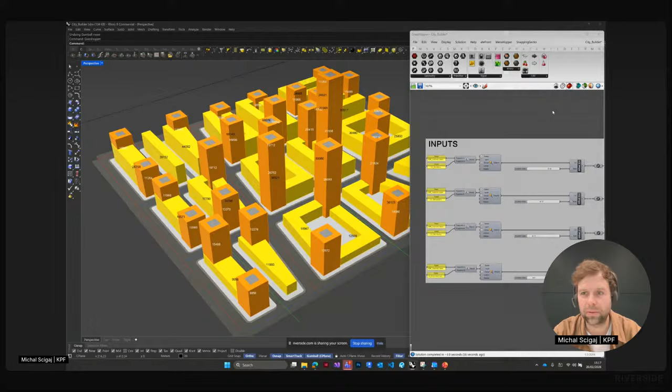All right, so looking at this, I'm hoping that you guys are already ready and you have your Rhino files open. Please open a completely new Grasshopper file. I already have one prepared right here. And let's zoom in at the setting out lines for a second. I will maybe sketch over to explain what we're going to do first, so when we actually do all those things step by step, you understand where we're heading.

So we're going to start from actually generating roads, which will be offsets of those lines. And then we'll connect those lines into one outline, and this way we're going to get parcels. Once we have parcels, we'll obviously divide everything nicely. So we have the surface of a road, surface of the sidewalk, surface of the parcel.

And on top of it, we're going to also create buildings, as you could see in the preview I was showing you earlier, with some sort of towers in the corners, located as far as possible in each parcel, so there is limited overlooking happening. All right, so having this in mind, let's start developing the script. Oops, not here, this way.

So for those who are using Rhino 7, you will probably have to follow the old way of doing things, meaning grabbing the curve component, right click on it, and set objects which are on given layers. So whenever I try to pull out some things from a given layer, you'll have to do it manually.

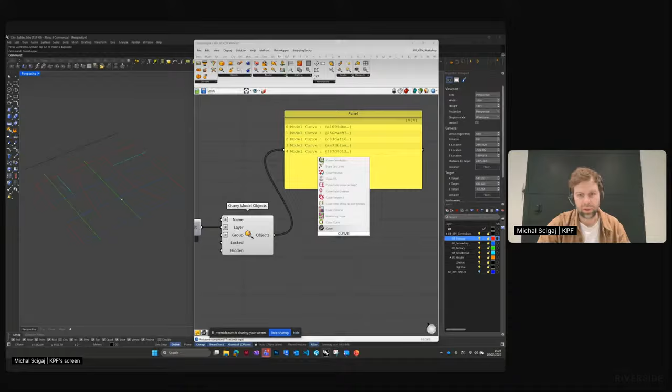So this is still not lines. Lines will be actually collected when we connect it to the curve component, and now you can see the preview visible on the left side. I'm going to actually click this yellow cylinder in the right corner. What it does is it previews the objects which are marked on the Grasshopper canvas. That helps a lot when you have many things happening in your canvas and you want to see only the thing you're actually working on. So I always have this one on, actually.

So the first thing, as I mentioned at the very beginning, was to create offsets on both sides of the center lines. Let's do that. Let's use offsets. Let's first create a number slider from 10 to 30. I think that should be big enough. Yeah, let's keep it like that. If the road is, let's say, 20 meters, when we offset this curve, we actually want half of this distance. So let's use division. Let's divide this number by 2.

Oops, let's try again. Here we go. So now we have 10 in here, and let's plug it into our offset curve component. So we got the offset on one side. Now we need to flip it to the other side. So let's copy it, and let's add a negative node here. Perfect.

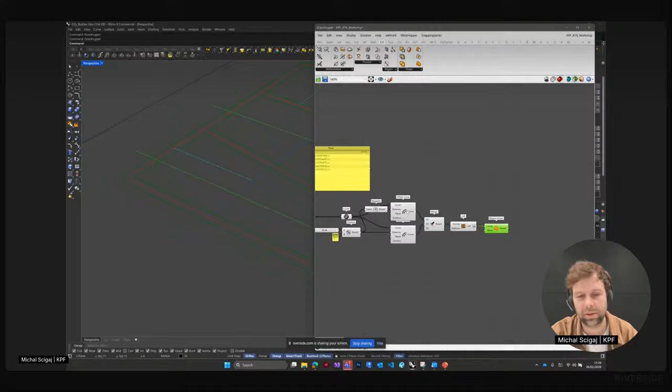Once you got your lofts, let's flatten this. And then we're going to go to the tab called Intersect, and we're going to grab Region Union. Why am I using Region Union? Because now we have one outline: all those surfaces we just created are merged into one big outline. And this is exactly what we wanted to achieve. So this is great. Now we want to do the same exercise with all the other layers.

If I move it to the side for a second, we can remove that now. Let's make it a bit cleaner. As you can see, I'm a little bit obsessive about how clean your script is, because the biggest trouble happens when you do a very messy script and somebody takes over your work and nobody knows what's happening in it. So I'm trying to be very clean whenever I do anything. So I'm grabbing all those things we just created and copying them, maybe 4 times, because we have 4 different types of layers.

And the only thing we will change in each of those inputs is the name of the layer in here. So instead of primary, we're going to do secondary. In here, we're going to do tertiary. And residential paths will go here. Oops. Let's try again. Great. Perfect. I would also turn off the preview, just in case you turn the green button off and everything shows up, it can slow Grasshopper a lot.

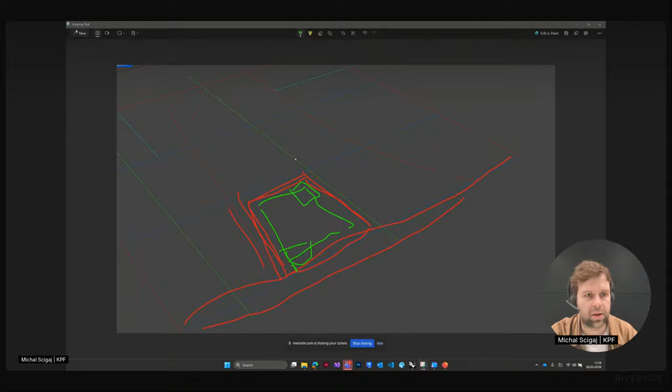We will have to merge all those lines again, as we did with Region Union. Great. Let's flatten it in here just in case. Everything needs to be flattened. And let's add this one here. Perfect. Okay, so if we look at what we have here, you realize that we generated pretty much what we discussed earlier, right? The outlines, which are now creating parcels and streets. Technically, what we have on the screen is parcels and some huge outline, which we don't need at this stage. So let's get rid of it.

How are we going to do this? We're going to sort all those outlines by their area, meaning the smallest outline will be at the bottom of the list, and the largest outline will be at the top of the list. Let's do that. So we're going to use the area component, and then the sort component.

And this way, if I just do a check, let's check what's going on. Let's use the list item component. List item outputs the first item in the list, or any actually, depending on how you set up the index, but the default is 0, meaning the first one. So this is the smallest outline. And if I right click on values A in sort and click reverse, it's going to grab the largest, which is exactly what we want to do.

Perfect. All right, so at the moment we're grabbing the largest, but we actually want to remove the largest, right? So how are we gonna do this? Let's use cull index. Cull index does the opposite to list item. It removes the item at a given index. So we want to remove item number 0 in this case, which is the largest. Let's plug it here, and let's plug this one there. Great. So now we have only parcels, which is perfect. This is exactly what we need.

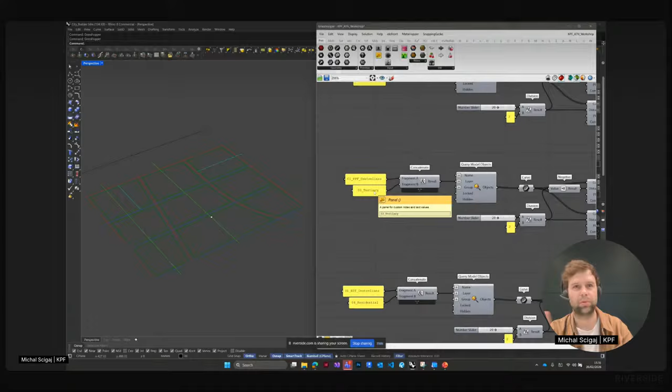Let's forget about this big outline for a couple of minutes. We'll come back to it, so keep it in mind. We want to focus on parcels first and generate all the sidewalks, bring also residential paths, bring also tertiary roads, which are technically back of house roads. So what's specific about those remaining roads? Tertiary roads are technically some sort of back of house road. This road doesn't need any pavements or sidewalks. It's just a pure road, fairly narrow. And oh, I forgot to actually change dimensions of those roads, so we'll do it in a second.

So looking at the script as a whole now, this is where we should be. We have the inputs, we have our parcels right there. Let's change the sizes of the roads depending on their priority. As you remember, going back to the inputs, we gave 20 meters to the primary roads. Let's give 15 meters to secondary, maybe 12 to the tertiary roads, back of house roads, and 10 to residential paths. Maybe let's do 8. I'm more happy with 8. That is great. So now if we look at the parcels, we can clearly see that we have wider roads and narrower roads. Great. All right, let's move on.

So what we're gonna do next is grafting. And why do we want to graft? Because we're gonna bring those back of house roads, and we want them to impact every single parcel, and to do so grafting is necessary, unfortunately. So let's do graft here. I'm also gonna right click on this component and change the wire display to faint. Why I'm doing this is about the readability of the script. I want to indicate that this is a completely new operation compared to this input, and probably we should have one more faint line in here. Okay, let's turn preview off. This way we have a very clean script.

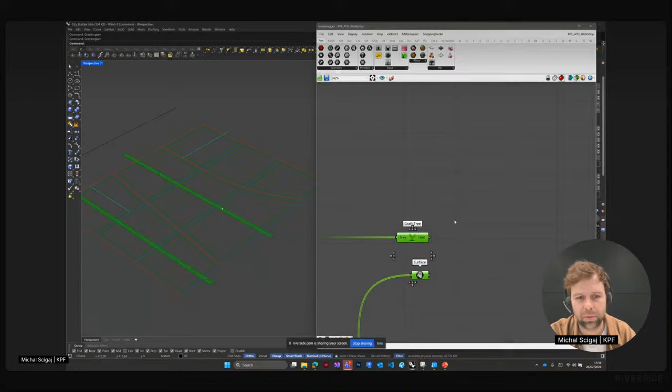To remove this road from the parcel area, we're gonna go again to intersect, and we're gonna use region difference. Region difference works almost like Boolean difference in Rhino. You have one object that you use to remove something from the other object. So from parcels we want to remove our back of house roads. And as a result, you can see the original parcels looked like this, and now we have them without those roads, which is perfect.

Okay. Where are we right now? These are not actually parcels. I would say these are the edges of the sidewalk. To have the exact edge of the parcel, we need to make some space for the sidewalk. So technically, we need to offset this line inwards by 3 meters. So let's do that as well.

Here. And we actually will do it here because, as I mentioned, we don't want sidewalks in back of house roads. So let's do a number slider from 0 to 10, and let's set it up to maybe 3.

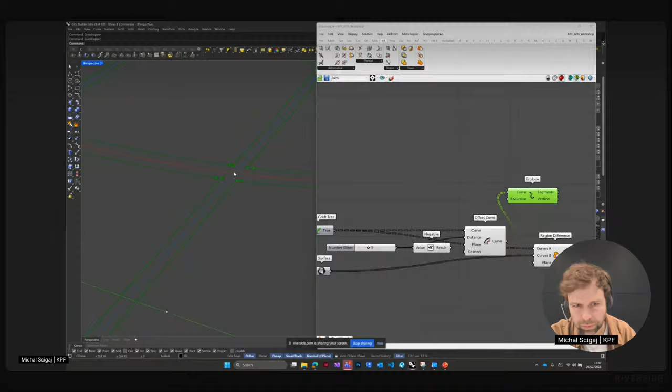So now, as you can see, the new outline is actually larger than the base line, the input line. When we explode this offset line, the offset created those weird extensions that you can find here. There are many methods to remove them, but they quite often create headaches, so I rather don't use them.

When I start thinking about how to build a script, I try to go from outside to inwards. I don't know, that helps a lot.

Okay, so once we have these offsets, we want to remove from - because this is actually the outline of the parcel, and this is the outline of the sidewalk - we want to remove from the parcel our back of house areas, and we want to do the same to the sidewalk outline, which is here.

So as you can see now, if you look at our outlines, we don't have sidewalk anymore where the back of house road is, which is exactly what we wanted to achieve. Perfect. Let's maybe also name this.

So now when we work around those lines, we will be able to find them easily. So this is our sidewalk outline. It should be curved, sorry.

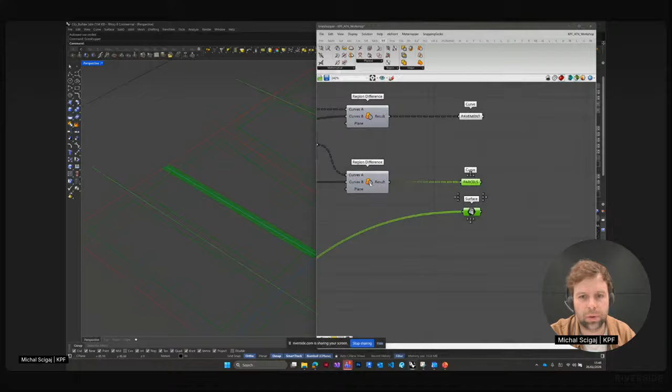Firstly, let's remove those paths from the parcels. And to do it, we're going to use, again, region difference. I'm going to copy this one here. Okay, this is done.

All right, works perfectly. And now another step is to do the same with the pavement. Actually, not doing it with the pavement - we actually want to trim those lines.

And we're going to achieve it by projecting them onto the pavement. So we're going to use the project component. Perfect.

As you can see, I grafted it, and added those curves to curve. I mean, it's the surface, but if you move it to the curve input, it will read it as the outline that creates this surface. And I move the pavement towards the B-rep of the projected curve.

So what we have now is we need to probably simplify everything because the paths of our trees are so deep right now, it's hard to understand what's happening. So let's right click as well on the pavement and click simplify. Let's do the same in here.

So what we have in here, we see that we have paths with a depth of 2, and in here we have paths with a depth of 3. Let's simplify as well to 2. Okay, so they should work with each other now.

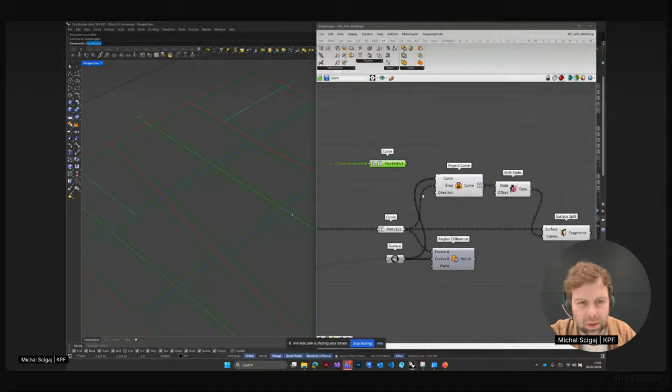Sorry, I probably confused you a little bit. Let me explain. What we want to generate is add those residential paths into our sidewalk. So actually we need to trim it by parcels, not by sidewalk. That's why I moved everything to the other side.

Let me sketch over this. The surface literally has this outline rather than this one, otherwise they won't perfectly fit. So this is exactly what I just did. Okay, so this looks great.

The only thing which is not correct is that we divided the surfaces, but we still want to get only those trimmed outlines of the residential paths. To do it, we need to firstly detect which out of all those surfaces that create parcels are inside the outline of the residential paths. I hope it makes sense, but let me do it and maybe you will understand.

So how are we going to do this? Firstly, let's create some sort of point inside each of the surfaces, and I'm going to use populate for that. Populate as default creates 100 points, we just need 1 point per each of the surfaces. As you can see, I created 1 point in each of the surfaces.

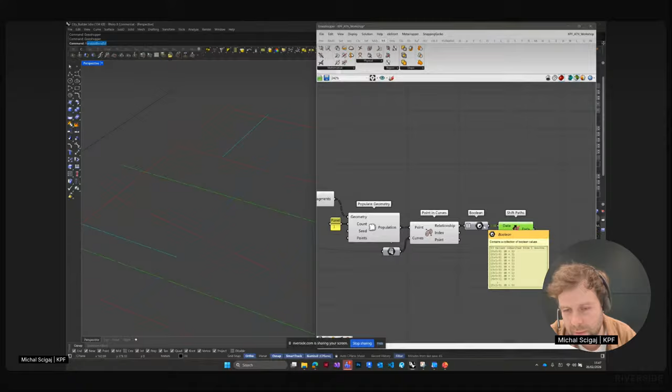So that's great. We want to use Boolean to turn it into a true-false relationship. Let's see if the data tree structure matches what we have right there. It doesn't, which means we need to shift it, so we're going to use shift paths. Shift paths is kind of removing the depth of the path. So here we have a depth of 3 of each branch, and here we have 2, which is matching our input.

Now we're going to use cull pattern to find this line, but it didn't cut it properly in here. This one is still not cut correctly. Let's have a look at what's going on. This one is there, we're happy with that. So for some reason, this one doesn't cut as it should.

Let's use grafting here. Okay, so this is why. Perfect. Let's use grafting here, so let's add grafting to parcels. Just to be clear, if we go back to the parcels we had at the beginning, we're adding graft over there, and now we are good to go.

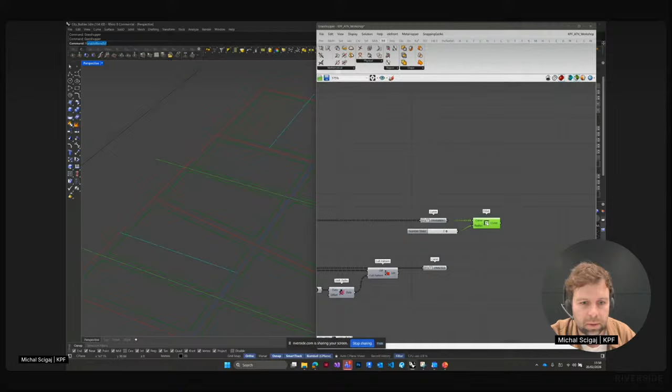For the parcels, we need to use this fillet plus the number of the offset we did somewhere at the very beginning. Let's grab this as a number, and turn the wire into fade so it doesn't bother us when we stretch it across the whole script. Let's add those numbers. Oh, actually subtract, because it needs to be smaller.

Okay, so as you can see, now we have pretty much perfect relationship in terms of the fillets. Only thing which we're missing to actually generate surface of the pavement is region difference, the parcel against the outline of the pavement. So let's take the region difference, bring it to the front.

From the parcel, let's remove the fillet of the sidewalk. Let's remove the fillet of the parcel, and we end up with this, which are the outlines of the pavements. Now we can use boundary surface to kind of fill it with a surface because we had only outlines.

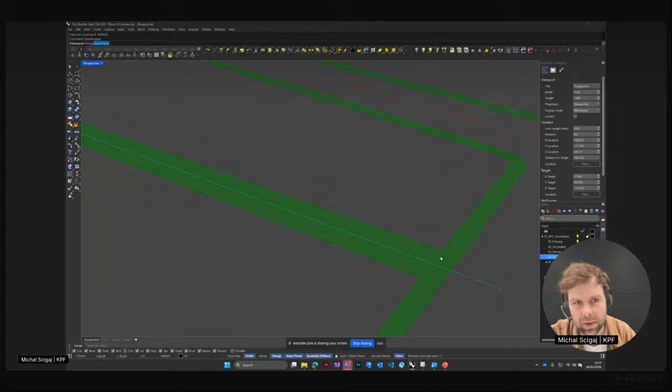And now let's use brep join to join those into one sort of element. But the problem is actually when we zoom in into this location, we still have these faces or edges, which we would like to remove to have a clean geometry.

To do it, we can actually go to surface util and use a component called merge faces. With merge faces, we remove this, we have very clean geometry, exactly what we wanted.

Perfect. So let's use preview. Whoops. Yeah, this is it. Yes, custom preview, this is it, to preview this when we turn this button off.

And it's use color swatch to give it some color. Let's make it gray like this. Let's make everything preview off.

And let's also create the parcel. Let's also preview our parcels. So what I'm doing right now is if I turn off this option of seeing the geometry, and I go to this view, you see I will always see now our pavement with this color. I will make it actually a bit brighter.

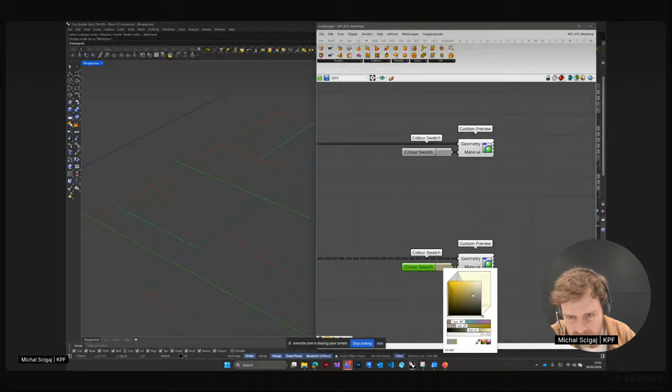Okay, is it visible? Yeah, maybe a bit too deserty.

Okay, so the last thing we're missing are the roads. You remember I told you to leave the outline, the big outline, at the very beginning. This is a moment for this outline to come back to our script. So let's use curve component.

Let's make the wire faint as well. And let's pull it all the way to the front where our outlines of the pavements are, which are here. So what we will do is merge those. This is our, let's maybe type, what is this?

This is pavement. So I'm merging pavement, and this is parcels. So I'm merging pavement with this huge outline we had at the beginning, and then I'm going to flatten this. Preview off as usual, and we have all those outlines.

All we need to do at the end is copy boundary surface component. And here, as you can see, we have roads generated. Copy the custom preview component, connect it to the surface. And let's make it darker since this is our road.

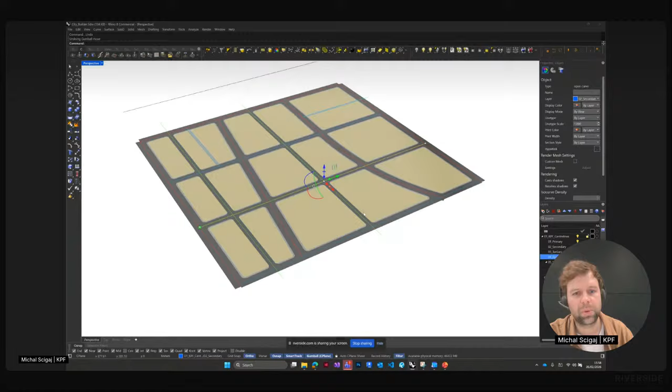So what we're missing right now in here are our buildings. So how are we going to approach buildings? Let's sketch over this parcel. But maybe at this point, I will ask if you guys have any questions.

Does anyone want some clarification regarding what we're doing? Yeah, I think people are just watching along. I think there's no major questions as we go, but it's really cool to see this process. Also for myself, it's always really good to see how you guys were doing it, because it was kind of like a similar approach, right? That we were always doing, like you draw the lines and then you script the rest. That always seemed to be what worked really well for master plans. Yeah.

I would say even beyond master plans, even when you work on buildings, I always start from setting out lines. In a building case, let's imagine this is one wall, this is the other wall. I start from these 2 lines, and then whenever we need to do some changes, let's say it's a tower with some podium, which is rectangular, then later down the line, I'm just adjusting those lines and everything is changing in the tower, right? So setting out lines is actually key to any Grasshopper script. Anything we do at KPF in Grasshopper is starting from that.

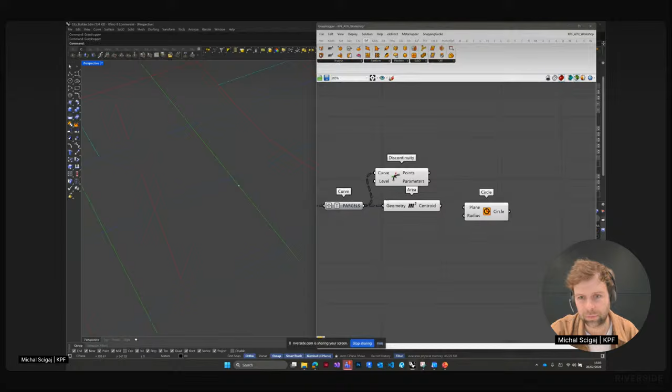So let's firstly grab the corners, and I use discontinuity to find them. Then I'm going to use the area component, because the area component has this nice feature of centroid. We can remove area and just keep centroid. It defines the center of the surface. And then in this center of the surface, I will create a circle. I know it's a bit strange I'm creating the circle to do this, but you will know why. I'm gonna give the circle 25 meters of radius.

And now I'm gonna sort those points around the circle. Why? Because the circle created by Grasshopper on a point is always starting in the same location. If we add end and beginning of the circle here and look at the circle, you see that those circles always start from the same direction. So it's a very good trick to organize your points in the 3D space of Rhino. Okay, so let's use it to sort those points.

We're going to use Sort Along Curve. I wrote it badly, but it found it anyway. So I'm going to connect circle to curve, points to points. And now we should have those points nicely sorted. Let's have a look if they are sorted as we want.

Let's use list item to see if we grab the first point, it will always be in the same corner of each parcel. As you can see, when we grab the first point of the list, it's always from the same corner of the parcel. It's exactly what we wanted. And now we're going to rebuild this parcel again with polyline.

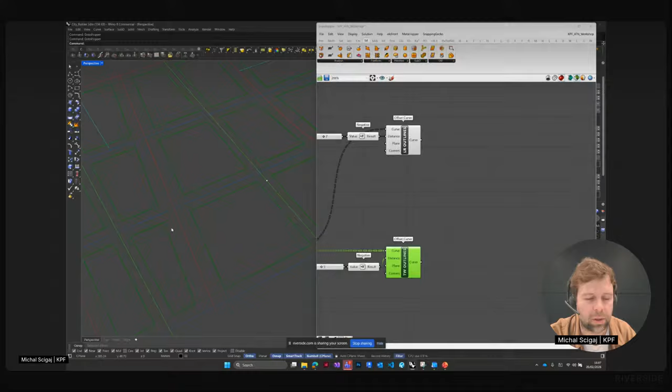And now let's focus on the towers and let's create those towers in different corners of the parcel. How are we going to do that? Let's start firstly from cleaning our paths, and let's simplify. So now we understand how the paths are built and how deep they are. So we have depth of 2 in here. Let's explode it.

Awesome. And then to find the location of this tower, we probably need only this line and that line, because that will be the setting out line of the tower. So let's remove every second line using cull pattern. And then let's use a panel where we will describe the pattern for this cull. So panel, I put 1, but I'm going to add also 0 below. And right click multi-line data, so that now Grasshopper will read each row as an individual item. And this way we managed to get what we wanted, meaning those setting out lines.

Now we need to cut those lines so they become one side of the tower outline. To do so, we're going to use evaluate length. And this is a good moment to bring in the depth of the tower floor plate. So let's start from, I don't know, we can have probably the lowest 25 up to 40. But we'll set it up as something which works quite well, which is probably 31.6. Okay. So we are already getting what we wanted.

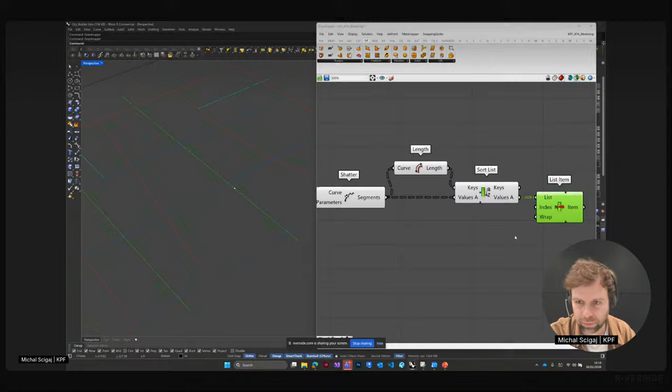We need to get another side, and we're going to get it by offsetting. And let's offset it with the same number as this one that we used to define the edge of the outline. Okay, once we have this one in place, let's use ruled surface. Ruled surface connects two lines and creates a surface.

But you can see that those outlines appeared in wrong locations. It happened because the offset went in the wrong direction. So let's use negative in here. Connect our 31.6 number to negative and then to the distance of the offset. Okay, and now the tower is in the right location. Cool. So we have tower outlines.

Let's look at the low-rise outlines now, which is here. Okay, I would maybe give it a little bit more. Maybe let's give it 10. I think it would work a little bit nicer against those towers. How are we gonna get this now? We will grab these outlines that we just created. Actually, we're gonna copy all that thing.

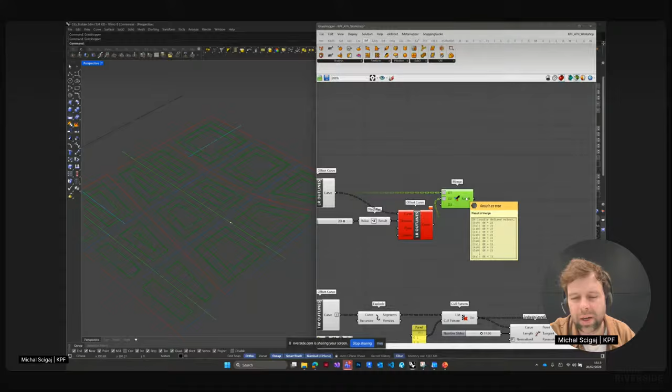So now we're going to merge this one, which is the external outline of our low rise, with the internal outline of our low rise. You can see that our paths are a little bit mixed. So let's simplify it here. Okay, now they're clean and organized. And let's use boundary surfaces to generate outlines of the buildings.

Okay, this is great. We have both outlines, but we still have a clash between towers and the low rise. So we need to remove the outline of the tower from the outline of the low rise. Let's see firstly how our path structure looks. We have depth of 2 in here. There is lots going on in here, so let's simplify. Okay, so we have 3 in here, which is understandable because we have 2 objects per 1 parcel.

What we want to do now is shift this so they are the same. Great. And project those outlines of the towers on the boundary surfaces, the outlines of the low rise. And this way we created cutting lines, which we're gonna use to cut the outlines of the low rise. So let's use surface split.

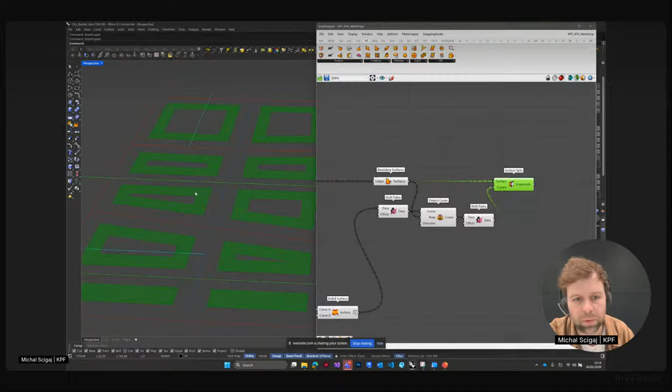The only problem that we have right now is that we have both the outlines of the low rise and those remaining pieces that we don't really want. Okay, great. Let's remove those which we don't want, and we're gonna repeat the operation we did earlier. Actually, I will build it again, so I don't bring too much confusion. Let's use populate again. You remember the count is 100, so let's use 1. So I created a point inside each of those surfaces.

Now let's check which of those points live inside the outline of the tower and which don't. So firstly, we need to shift this guy again because the path structure doesn't match the path structure of our tower outlines. Are we good here? Yeah. And we're gonna use the points in curves component. All right.

And we use cull pattern to remove those which we don't want. As you can see, we removed them, but we actually want the flipped side. We removed the low rise now. We want to remove the remains which are inside the tower outlines. Boom. Okay. This is it. So we have the whole base ready, exactly what we wanted.

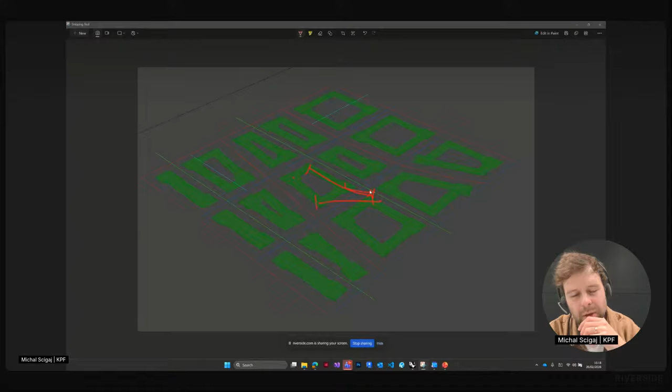The next step will be extruding this. And we probably want to extrude it by a certain amount of floors, depending on the attractors I mentioned earlier. Let's sketch over this. We want to create another portion of the script that measures distances from the center of each of these towers and low rises, and says, okay, the closest are the tallest and the farthest are the shortest. Let's try this and see how it works.

Firstly, for clarity, I'll create a big surface component, and I'll call it low rise outlines. And for the towers, tower outlines. Let's use flatten in here. Awesome. Now we need to bring those attractors to Grasshopper so it sees them. We're going to go back all the way to the input side. Let's grab this chunk of the input, copy it, and move it to the front.

And let's grab this layer, height, and then let's copy this panel, because we want to grab also those sub layers, starting from the low rise, then grabbing high rise as well. Amazing. What I did was right click, multi-line data, meaning Grasshopper reads each row as individual item.

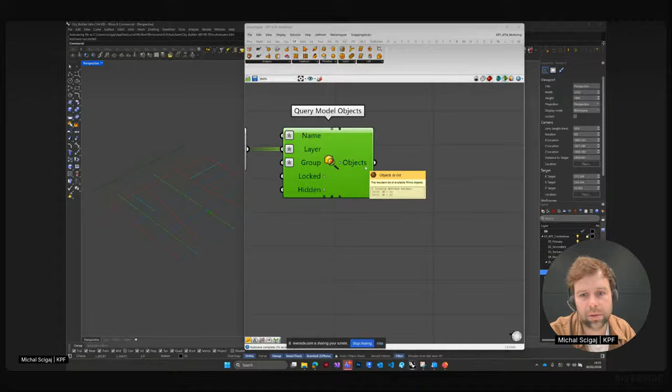That is great. So the component, the query model objects, already sees them. And what is also amazing is that it divides them into individual branches. So if we use explode tree right here, we're gonna have model curve, which is visible right there, which is responsible for the low rise. And we're gonna have model point, which is responsible for the high rise. So for the exercise of getting the tower height, we're gonna use the point.

Let's grab it. And what we want to do in here is measure the distance from the tower center to this point. And then we'll have to somehow remap those numbers into heights. Okay, so let's do all this. Let's start from area component, again, to get the centroid of the outline. Let's bring this point closer, use distance component. So this component is measuring distances between all those points. I'll actually use also number here. Why? You'll see later. For now, let's just do it as it is.

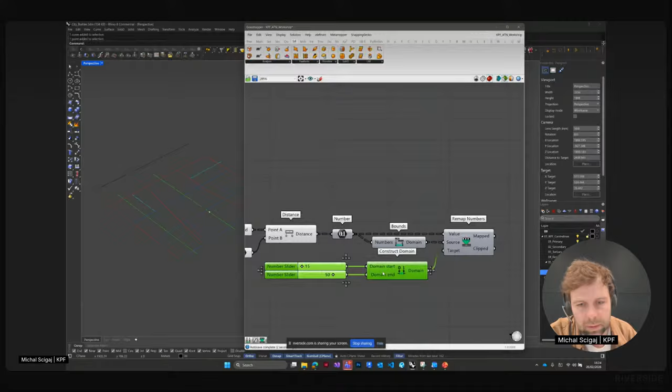We need also bounds. So what this is doing is checking what is the largest and the smallest number in those measurements we did in there, and turning it into domain. Okay, let's see what's happening now if we try to extrude all this. Oh, we need to also multiply by the floor height. Sorry, multiply floor height. Let's start from 2.5 and let's go all the way to 4. And maybe for now, let's do 3 meters.

Perfect. Let's grab our tower outlines to the front. And now let's extrude them. See what's happening. So I use extrude component and I use Z vector. So we're extruding vertically up. All right. So the numbers haven't changed because what we need to also do in bounds component, we need to flatten it. Okay, now it works. So this is not exactly what we need to achieve, right?

We wanted actually the towers to get the tallest around our point and get the smallest everywhere where it's far, depending on the location. This tower should be the smallest right now. So let's do that. It's a very simple operation to change it. We just need to change in domain, starting from 50 and ending on 15. Great. It's not perfect, but it's already going in the direction we wanted to go.

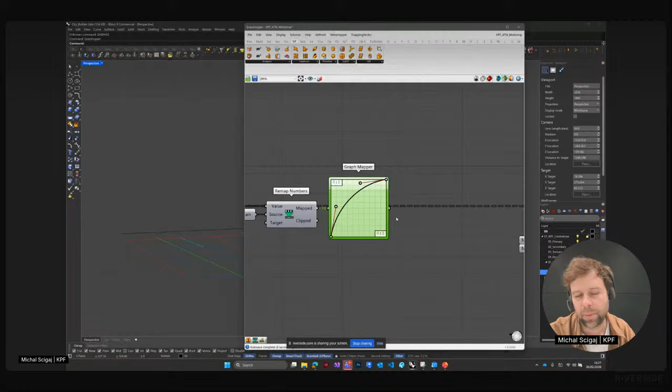Basically, you can use it to create charts. So right click on it, graph types. Let's use this one. It's called Bezier. And let's create some sort of like a sinusoidal shape in it. It's kind of remapping a little bit the numbers. You're shaping the numbers so they adjust in the direction we head in here. Great. So now we can connect this back into our remaining part of the script. That looks good. Great.

Awesome. Let's see how it looks. Yeah, this is already looking much better. I would say maybe the towers on the edges are a little bit too tall. Let's give them 12.

Let's have a look how this works now. Yeah, that probably looks more like an actual city. What I think is missing is a bit more randomness in their height. Let's add that as well. So let's make it a bit random as well. That's gonna happen in here.

Let's use integer to round the numbers that come out of this component. And then let's use random nodes, and we need to give it a range of numbers that it creates. So this one, you give it a number, you give it a domain, and it populates the number of random numbers inside that domain. So the domain that we create, let's construct domain.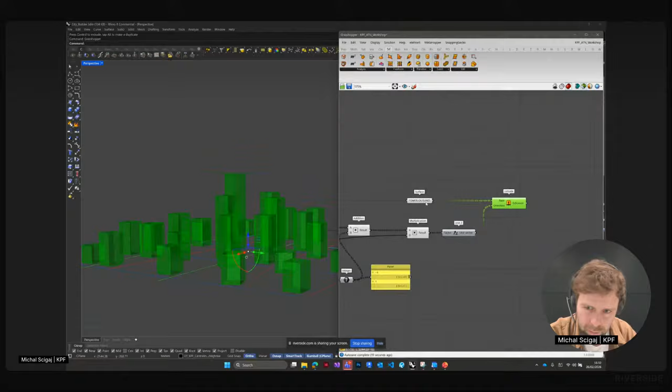Awesome. We probably want to also calculate the areas. At the moment, I'm creating pure massing, and we want to also have cores. So let's start from the cores. We'll grab cores from here. We'll just pretty much offset the outline inwards. So negative offset by some number. Let's use number slider again from 4 to 10. Set it up at 9.

And now let's use our old friend, which is region difference. From here, removing this one. Awesome. So this is our core boundary surface. So the core is in here, and this is actually our floor plate. So again, let's use boundary surface. And it's connected here. Okay, so this is actually massing without the core. And if we copy this one there, we're gonna get the core.

Let's create the surface for clarity. Surface. Oh, it's actually BREP, sorry. BREP. So this is our tower massing. And this is our tower core. What we're missing in this whole equation is the floor plates, and then obviously the low rise, which will be easy because we just copy everything.

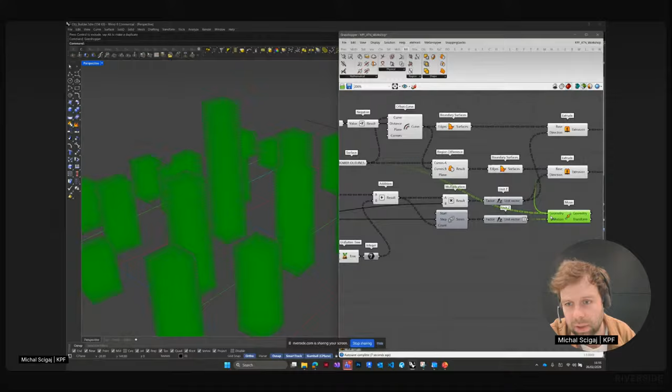And what we will do now is copy the Z vector, use move component, connect Z vector to motion to define the direction and also the power of the vector. And let's bring our floor outlines. Let's check only if our data trees match. I'll simplify here. Yes, the data trees match. Great. So we have now also floor outlines. Actually, we want these ones here, right? Because we don't want the core. Yeah. Cool. Let's extrude it by the floor height.

And we need the vector by the floor height, which is 3 meters.

Let's add previews to this. So this is tower massing, tower. Let's call this tower floors. All this data requires some preview, which we can take from here. The tower core, we quite often use gray color. For residential buildings, we use sort of yellow. That's like a standard KPF, and I think that's a general standard. That'd be like this.

We're going to use the same color for tower floors, so we just flip between the two of them if you want to. We're going to keep maybe the massing off and just keep the tower floors. Let's remember to turn off all the remaining elements, the preview of those elements, and let's see how it looks in 3D. Okay, we're getting there slowly. We just need areas, and then we're gonna copy all this to our low-rise, and we'll be almost there.

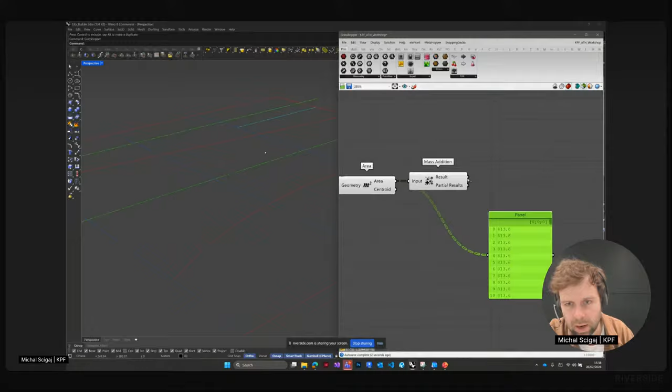And then we're gonna actually combine all these areas into one number, and we're gonna use mass addition for that. As you can see, all those areas here are dropped into one number. And because it's a master plan, let's use integer to round those numbers into integers rather than floats.

And now we want also something that will display these numbers on the screen when we're actually spinning the model around. So let's use tag component. Let's use the centroids that we already have from the area component. The only thing is we have too many of them, right? We want actually some average points somewhere in the middle of the tower. So let's use average component, or average node, and then put it into location and to text. So this is it. Let's use color swatch.

And for the towers, let's keep it white. It looks good.

Let's preview what is happening in the model. Great, so now the towers are visible. The floors of the towers are visible. Cores are there. And now if we move our attractor to change the location of the tallest objects, maybe to the side of the plots of our model, let's do it. But what I want you to see is that this is the tallest tower and it has the biggest amount of area, which is what we should expect. The shortest tower has the smallest amount of area.

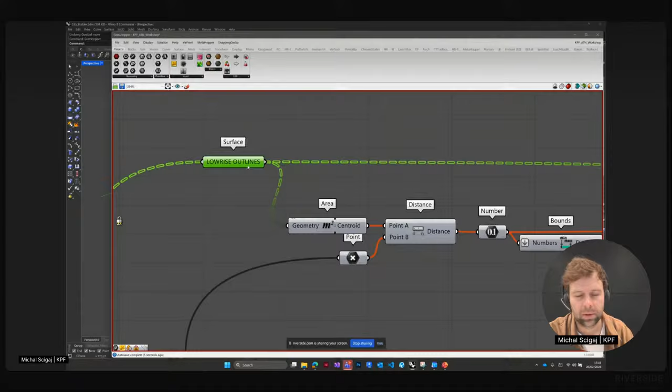Before I actually free the canvas, I will actually lock what's happening at the front. I'll turn it off just in case something doesn't work. We don't want our Rhino, Grasshopper file to crash. Firstly, we need to understand if these calculations work well, and then we'll gently turn each of those components on. That's what I usually do when I copy paste things.

But the other thing is that we don't want to use this point as an attractor of the height. We want to use the curve now. So let's bring the curve. Let's make this smaller.

I will also turn off this part of the script, so we work only on that one. This is off, awesome. Okay, let's unlock it.

Let's bring our line. This line is visible right there. Now we need to measure the distances slightly differently. We can't use this distance between two different points.

We need to measure distance from the centroids to this line. We're going to use Pull Component, Pull Point actually. Let's put curve into geometry, the centroids of our low rise into points. This way, Grasshopper found the shortest path between the attractor line and the centroid of that floor plate.

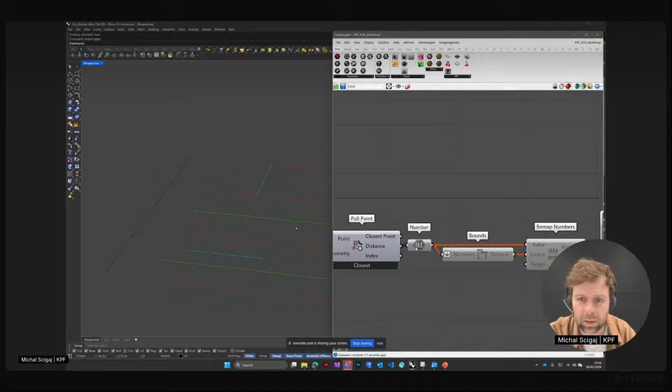All right, let's start launching the remaining part of the script and see how it works. So right click, or you can use shortcut Control E. I'm going to use Control E so it's faster. You can also use shortcut Control Q to make elements visible.

Let's say this one, you see I'm switching between those. I almost never use right clicks anymore, I'm trying to use shortcuts all the time. That makes things much faster - turning on, off, visible, not visible. Also right click F for flattening, right click G for grafting, etc. So yeah, that's really helpful.

Okay, so this looks good. The only thing is that we don't want the low rise to have so many floors anymore. So let's change those numbers. Let's make the smallest one 5 - okay, 6 maybe. And the tallest one, let's make it, let's say 11 floors.

Also this random step shouldn't be this big because that's more than the actual whole building. So let's make it maybe -1 and 1. The seeds, whatever, just change to something else.

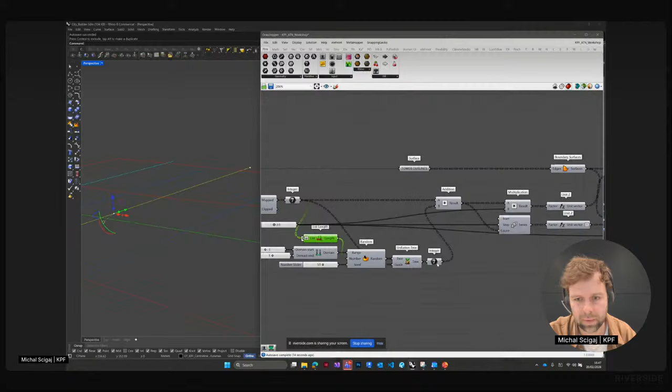In here, we are still in the same depth - depth of 2, depth of 2. This one looks good. And here you see the depth increased to 3, and this is where the mistake is coming from. So we need to shift it.

Still doesn't get it. Maybe we should go all the way around. Let's try that one. Okay, now it seems to be working. Okay.

All right, so that was the issue. Make it massing, okay, we are all good to go. The only thing which - no, everything works, the area is calculated. You just want to change this into maybe black. Great.

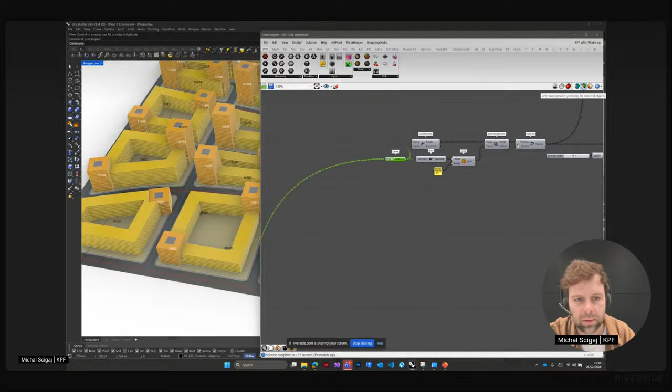Okay, so this is the reason why this is happening. We never remove those from our parcels. Let's do it now, hoping that it will work.

Okay, it's done. And it works as well. So let's play a little bit of those over here. Awesome, this works nicely. Great, so this is the full script.

As I mentioned, it's a very useful tool when you work on master plans. It's great also because you can scale it. And we're using pretty much the same thing quite often in the office. We add some more complexity to it, like making the outlines of the towers irregular so they fit the outline of the site boundaries.

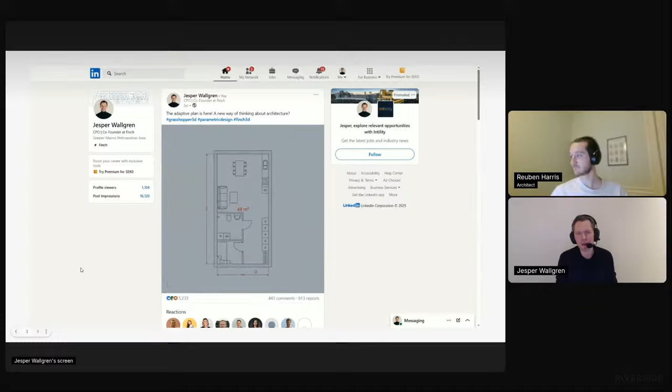Okay. So Finch, where AI and architects design together. It's me and Reuben that are going to take you through this workshop. I'm going to start with the Grasshopper parts and the Finch parts, and then Reuben, our Revit expert, will show you how to get all of the great architecture that we created into Revit. A very quick backstory about Finch: me and Pamela, our CEO at Finch, used to run an architecture studio in Sweden. We made a lot of in-house tools similar to the one Michelle showed here, and I posted it online just to share it with colleagues.

When I posted this video, the adaptive plan, it really took off, and firms all around the world started to contact us to see if they could buy this solution. That's when we folded the architecture company and started Finch, which has now grown into a mature software company with clients all around the world, here are some of them, and we have a great waiting list of architects eager to get up and running. We're doing our best to get as many as possible in as soon as possible.

A couple of words about the workflow in Finch. The massing is at the moment done outside Finch; we focus on the inside. So that first part here, uploading building exterior, is what has been shown here by KPF. And of course, we used Grasshopper to do that. I'm going to do that as well, but you can also start in Forma, in Revit, or in Rhino if you prefer that.

Then we're going to go into Finch. This is my part where we generate circulation, floor plans, and so on. And then here at the end, export BIM and CAD. That's where Reuben comes in, showing how we get into Revit. So we're going to go from Grasshopper into Finch and then into Revit. Okay, that's it for the slide.

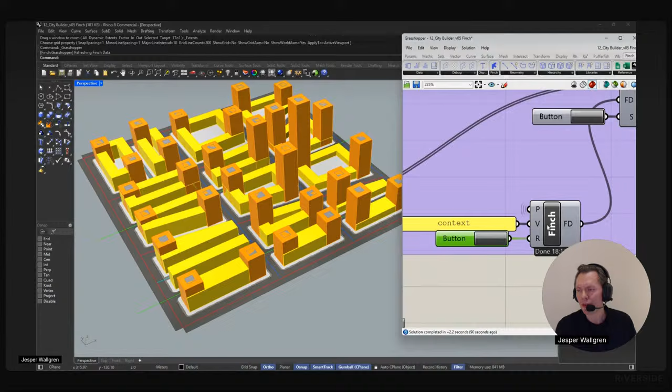And then I have my Finch component here. It asks for some input. The project name, ATN Live, I actually have over here; you can see that with the hidden lines, as you can do in Grasshopper. Context is the name of the variant, and by clicking the button, I load it in here. And if I click send on this context geometry node, there we go, you get some information. Now we have uploaded it. It was very fast, so it already went to finished.

And if we head into the web app and zoom out a little bit, you can see that here we have our context. So with just a click of a button, we have the context up in the web app. And if you update your Grasshopper script, a single click updates the geometry in the web app as well. Okay, so next step, we would like to send all of the buildings that we would like to work with.

But since we're going down to a high level of detail, all the way down to furniture, I think it makes sense to split it up. You might be familiar with the workflow both in Rhino and Revit, where you have different buildings in different files, and then you link them into a master file. And that's the same thing we're going to do here. But in Finch, we call it bundles.

So I'm going to go out here again, and I'm going to create a bundle. That's a bundle of variants. I'm going to call it master plan. There we go. Okay, so now we're setting up the project, and that is also an important part of working with these massive master plan projects.

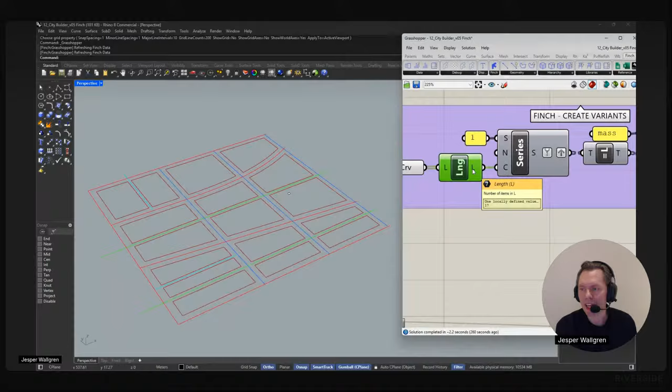So if I use the outlines of the different plots here, I think that's a great breakdown to create variants, to divide it like this. And then I made a little part here. It's very simple. It basically takes the plots created in the previous part here. It measures the length of the list, creates a series, and then we have a component that's called create variants in Finch. Let's see. So everything is up to date. There we go. Create variants in Finch.

And since we have a lot of them, if I click this one, there we go. I get a little warning. Are you sure you want to create 17 variants? I'm very sure, yes. And if I open the web app, you will see that it actually starts to create empty variants here. And this is really neat if you're working with really big things, so you don't have to do all of this kind of things manually.

And if we go into our bundles now, oh, sorry, I clicked the variant. I can also choose which one I would like to show here. So I'm just going to click all of the variants here. There we go. Let's see, there we have the context. Very nice. Back to Rhino.

So now I've prepared everything for this great project. And the next thing I'm going to do is to send the buildings created. So I have the script here. I have all of the buildings created, the cores and the low rise and so on. Finch asks for a building mass, for a single watertight mass. So we don't want to send all of the stories. We can match that later, but we want to send each building as one mass.

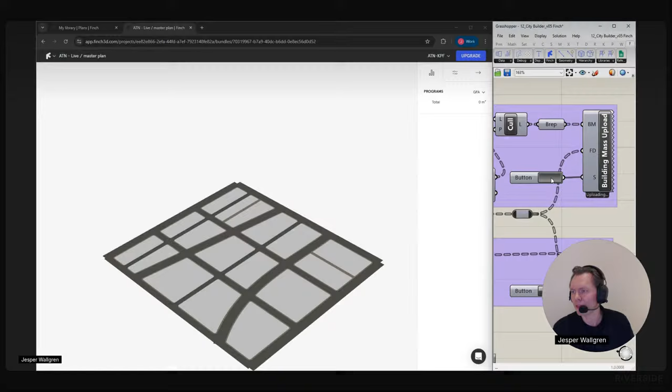And if I click here, actually I'm going to move Rhino over here. Let's see, we can do it like this instead. Okay, so now I have the web app here. And here we have the script in Rhino. Let's see, I've loaded everything. So if I send my buildings now, let's see if I get that. It uploads the building, it's queued, then it's processed, and as you can see, it's starting to pop in here to the web app.

And now all of these buildings are put in separate files, so you could be multiple architects working on a building each and so on. And as you can see, all of the square meters are popping in here nicely at the side as well.

The next thing I would like to do is to upload center lines. I'm not going to go too deep into it. What I've done is basically taken the center line of all the buildings, just an offset of the script previously. So I'm just going to send that as well to prepare our file.

And if I go into a building now, let's select this one, just double click it. It opens in a new tab. You can see it like this. And if I go into a story, there you go. I can see that I have my center line sent into Finch as well. It's a really neat way of sending things back and forth like this. And I personally really enjoy the power of Grasshopper, creating a lot of things, and then the simplicity of sending it into Finch and get all of my key figures in place and so on.

Okay, I need to refresh my data. What that means is that I refresh this Finch component to have all of the latest data that I've just sent, so everything is up to date. The next step I'm going to do is to send the story walls up. And what is story walls? In this case, it's the core Mikael created here earlier on, and I would like to send that not as a volume, but actual walls into Finch.

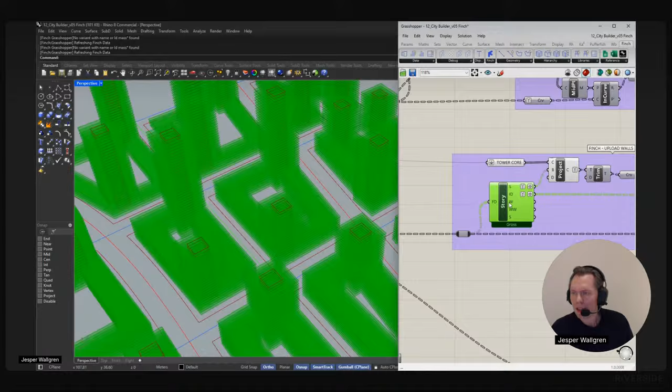And this operation, since this is such a massive project, if I were to send it, I think it would take 3 to 4 minutes for it to process all of that. So I prepared a file for you to follow along here. So if we go into the web app again, this is where we left. We've uploaded all of the buildings and so on. I'm just going to jump into a prepared project that has the exact geometry as the ones we've sent, but I've also sent walls. You can see that they are up here. I mean, in a small project, it goes in seconds, but it is a really massive project with 17 buildings.

Okay, so the last part I'm going to do here in Grasshopper before we jump into Finch and generate, to just prepare my file, is to, let's see, where did it go? There you go. Here I have my master plan. Of course, I need to send it to the correct place. And since I prepared the file already, I now need to change the project name to ATN 03 walls. So this is how you connect it. Whatever you name it in Finch, you just simply add it here in Grasshopper by name, and the data is downloaded.

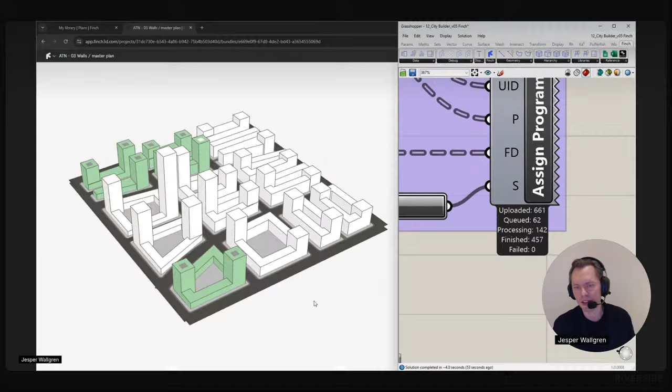So here we have the web app. Here's Grasshopper. Let's give it a shot. As you can see, it starts to upload. It's queued, processing, and as you can see here to the left, it starts to pop in to our model in Finch. As you see, there's a lot of things. It's a massive project. But there you go. Now we're done. Everything from the script has been uploaded to Finch. And we're ready to dig deeper into the buildings. So let's close Grasshopper and Rhino for now and focus on Finch.

And all of the things I've shown now is part of Finch free. So if you sign up to Finch, you can start sending your geometry from Grasshopper into Finch. And all of the editing tools and so on are part of Finch free as well.

Okay, here's our massive project. As you can see, we have a gross floor area of 1.3 million square meters, where almost 1.2 is residential, and then we have circulation up here. But I'm going to dig deeper into one of these buildings in this workshop. Of course, we could have my colleagues working on the other ones, but let's focus on one here in this tutorial. I'm going to choose this one. Double click to open it.

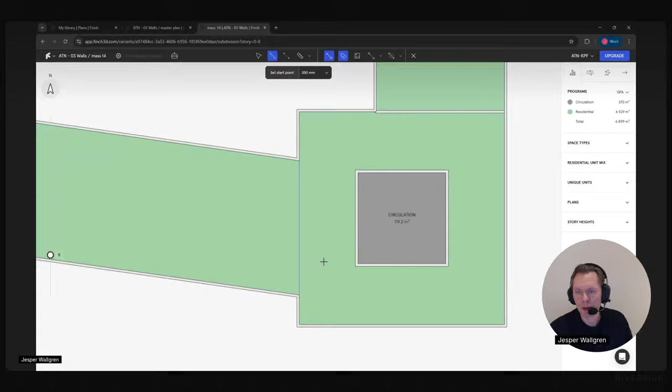And what I'm going to do is to simply select the wall tool. Let's make the walls 350. There you go. And I'm going to draw walls here, here, and the same for the tower down here. And now I snapped it to the corners. That is typically not how I would like my walls to be anchored here.

So the easiest way to fix this is to use the align tool. I usually just click A, but I guess it's up here. Align. I select the wall I would like to align to and what wall I would like to align. And then I work my way around. And this is a big part of Finch, because everything that's being generated or uploaded can also be edited. So you as a designer have total freedom of the design and what you want to create. Okay, there you go. I'm very happy with that.

So far, everything has been part of Finch free. The next thing we're going to look at is part of Finch basic. And this is the unit mix we're going to generate. And I've got a unit mix here. I can show you the piece of paper. I got it from Pamela in the office. I told her, just give me a unit mix. You play the client here, and I would like to fill the buildings with this unit mix.

So I'm going to select these parts, the low-rise part of the building now. I'm going to click generate, and I'm going to generate unit mix and corridors. And I'm going to start with the corridors. And in Finch, we can generate unit mix and corridors. I'm going to set the stairwell attractor on the inside to get all of my stairwells on the inside here. And then I have a bunch of inputs.

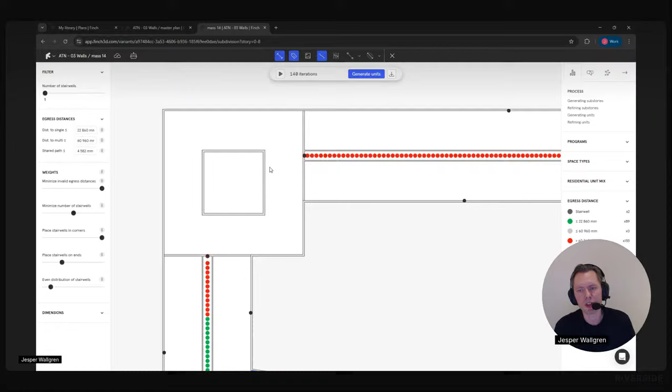based on the exit route distance or the egress distance I've added here, you can see that it's just too far away. So I would probably go for another solution. But in this particular case, we're going to freestyle a little bit. So we know that we will need more than 1, but I would like to connect it to the towers as well. So for now, let's just keep it like this and say apply plan. There you go. Okay. The next part is to start with the unit mix.

Before I do this, I've designed a lot of residential towers and have a lot of cores and so on in my library. And I'm going to show you a little bit about the library here further on, but let's start generating some things. I'm just going to make this a little bit bigger already now to accommodate for some stairs and so on. I could of course have added this one earlier on.

Let's see, let's make this 7 meters by a little bit bigger in this direction, something like that. Actually maybe it would be nice to pull it in a little bit. Let's pull it in a meter. And maybe I can align it with this actually. Make this 7. Yeah, something like that.

And then I'm just going to click generate floor plan. This is actually part of the enterprise package, generating floor plan. I will get back to you regarding that. I'm just going to set it up a little bit here.

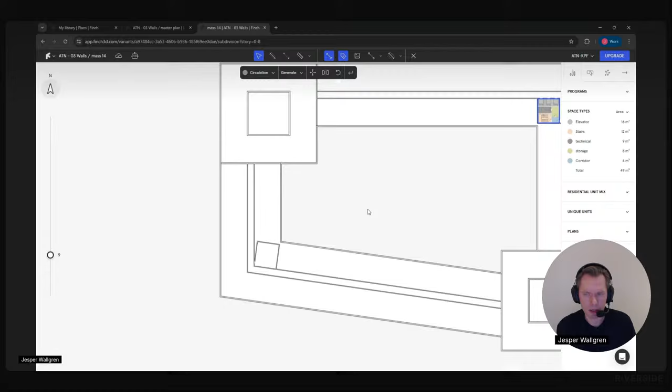And I'm actually going to copy this one and add it down here as well. Do you remember how big I made it? It was 7,000 by something like that. Just going to copy it, paste it, and now they are linked.

So when I copy paste in Finch like this, they are linked. That's really nice. So if I update one of them, the other one updates as well. Okay, very nice.

So I added my cores here, and now I'm going to start generating my unit mix. The little note I got here on the unit mix says 46, 70, and 95 square meter units for this project, and then they want some bigger ones as well, 116, 140, and some really big ones in the tower. So my idea is to put the big ones in the towers and the smaller ones here in the lower parts. That is, of course, a design decision.

Another designer might have said something different, but this is what I'll try to achieve here. So I'm going to select the areas. I'm going to click generate, and this is part of Finch Basic. Anyone can sign up to Finch Basic, €49 a month, and run these kind of things. And I'm going to select unit mix around existing corridor.

And when it starts to analyze where the corridor is, then it tries to find the optimal mix here. I'm going to add the mix I got, so it's 46, it's 70, and it's 95, and we can just keep it an equal mix of these things.

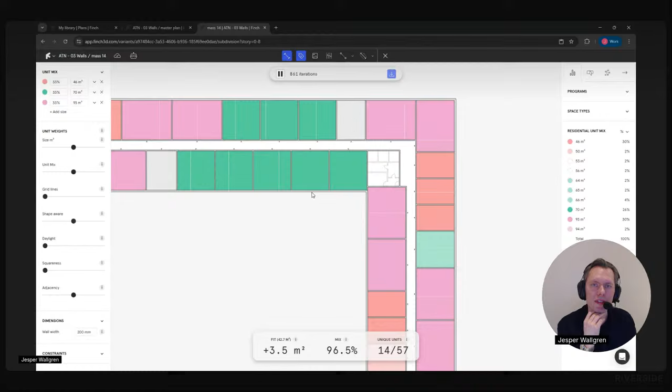But I think it starts to look really good already now, actually. So I'm going to pause it, and I'm going to add it. There you go. And as you can see, I have very precise numbers, and I can also open a panel here at the side to see where we have the unique units.

And what that basically does is that it finds all of the units with the same shape, for example this, 70 square meters, and just visually shows it to me. And that is a really neat way of just keeping track of your units, because no developer would appreciate if you came with 6,000 unique units in the project. You want to kind of rationalize it a little bit.

Okay, so now I have my units in place. I'm happy with this one. I can of course go in and also manually edit things. For example, one thing I would like to do, I asked for 46, 95, and 70, so it follows very well. As you can see, there are some units that take up the discrepancy as I talked about.

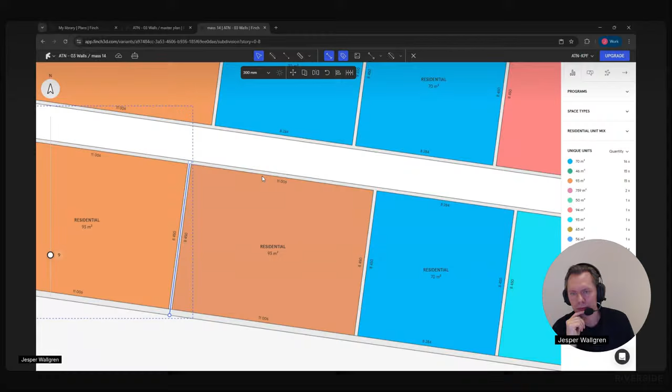It's you as a designer that says, okay, this is what I prefer. I'm going to move them over here as well. I think I'll do it like this. 82, 84, there you go. Let's make this one the same as this one. I'm not going to spend too much time on it.

I really enjoy the fact that I'm designing and getting informed at the same time. These kind of schedules are created in real time as I explore and work with my design. As an architect, as a designer, I think this is key actually, knowing what you're designing and getting information in real time as you're designing like this.

Okay, I should probably take a break in the designing now and move on. So now I have my units in place here. I would like to look at the towers as well a little bit.

To do that, I use the arrow keys, but I can also pull the story slider here, or I can simply double click outside, go out, and I can see I've created the units. I can double click into a unit or a story that I would like to work with.

To create a unit mix here in the tower, I could of course just fire it up like this and let it run and try to find the optimal solution, but it doesn't make sense before I know anything about the core and where to be able to exit it or enter the core.

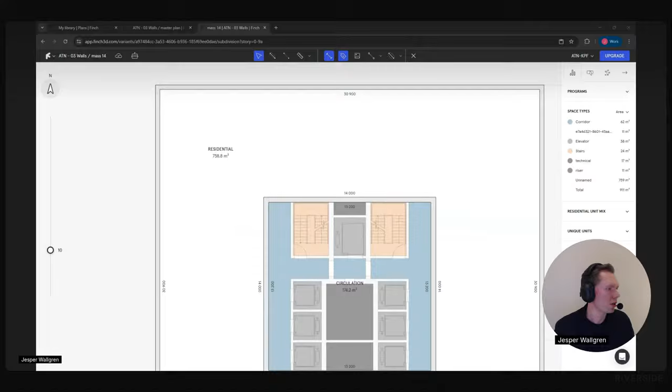Okie dokie, let's see. Yes, I promised some larger units in the tower. So let's generate unit mix around the existing corridor.

This could, of course, be a repurposing project and so on, where you have a structure in place already that you just want to generate units in between. So I'm going to open this one.

Let's see what I have in my list here. 116, and we have 143, 140 maybe I said. Let's remove this one. And then I think I'm going to go for some bigger ones, higher up. Let's give it a second.

And then I think I need to change some constraints here. Say that dual aspect is allowed up to, there you go. And then we're going to do shape aware unit mix. As you can see, there is some playing around with the parameters here.

For example, I had my dual aspect size set to 100 square meters, so no apartment larger than 100 square meters was allowed to only have access to one facade. I changed that to 200 here, so now I got this unit mix, and that actually seems to work very well with the things I asked for.

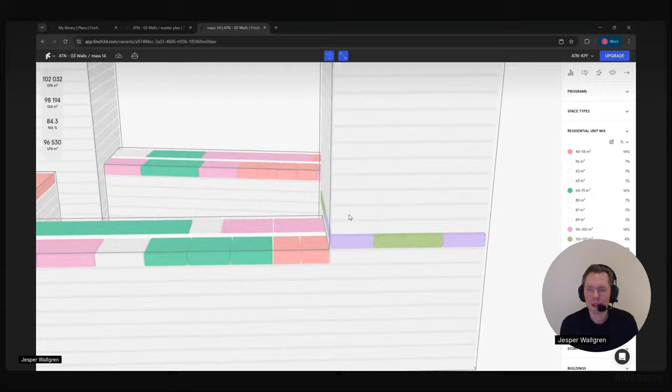So now I created a diagram like this. And one thing I like about this one is that you can immediately see that if you have units that doesn't match the desired unit mix here, for example, the unique ones in the corner, then they get no color. And either me as an architect say I think that's okay for my project, or I can go in and play around with the sizes here for them.

Okay, but let's get back to the tower here. I had the big ones here, looks nice, 116.

I'm going to actually do like this. I'm going to copy my walls to make sure I have nice vertical alignment. There you go. You can see that if I toggle it back and forth between these stories, it goes very nicely like this.

But of course, any architect knows that if you're working like this with a tower going into a podium, you will have some problems here where it lands. Some of the apartments will work, some will not. For example, this guy will have some daylight problems. So that's fine, we can probably put some storage or some technical space and so on. This is just the nature of these deep buildings landing like this.

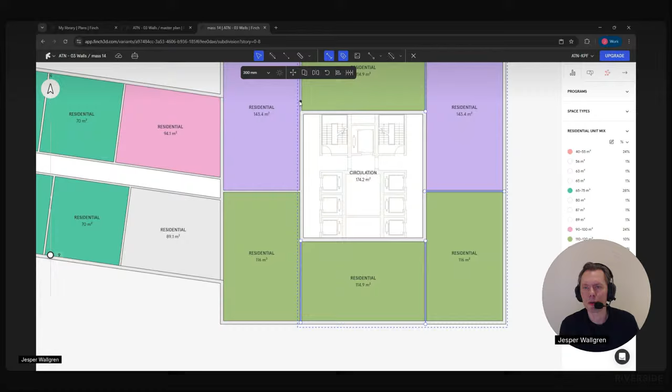I think my computer is struggling a bit here. There we go.

Nice, now I know I have the same things in both towers here. And if I go out in 3D, I can see, let's see, it looks great. I have them like that.

Maybe I would like to have the big ones going outside instead. Let's go and change that. And the best way to change it, I mean, let's just mirror it.

Let's see, where's the midpoint? Do I have it in the tower? Let's see. What was the measurement of this one? 13.

There you go. I think that works better with the big ones out here. And as you can see, although I've generated a lot of things here, I still like to go in and design it, and have the things I would like to achieve with this design and so on.

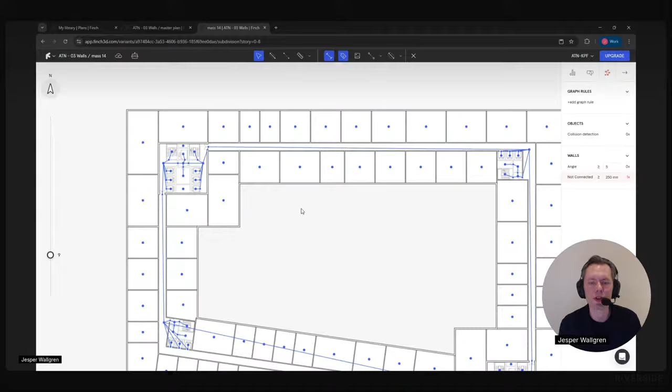And if I turn on my graph, you can see, yep, everything is connected. I also get a little warning. Let's see, what is that? That is just that it's a modeling aid. Here under the graph tab, I get all kinds of aid. I will go into how to work with it a little bit more, but now it warned me a little bit. I had some problems in my model. For example, if you have drawn a wall and it's slightly crooked and so on, it just helps you keep track of your model in general.

I got to fix it up here as well. There we go. Very nice. Everything is connected, and if I would like to measure the distance, I can use the smart measuring tool, for example, here in Finch. Measure path. I would like an offset of 300 millimeters. I think that's reasonable. Then I can measure the distance from, for example, this stairwell. I can measure around corners down to the next stairwell, how far it is, and so on. This is just a great way of doing this kind of complex measurements in the project.

Okay, I'm pretty happy with this actually. Let's fix it over here as well. As you can see, my tower, this works great here, but when it lands in the bottom here, it does not work as well. So I'm going to take one of these sized apartments, 93, it's 116. Make this the same one, 116, and then pull this one up here, something like that.

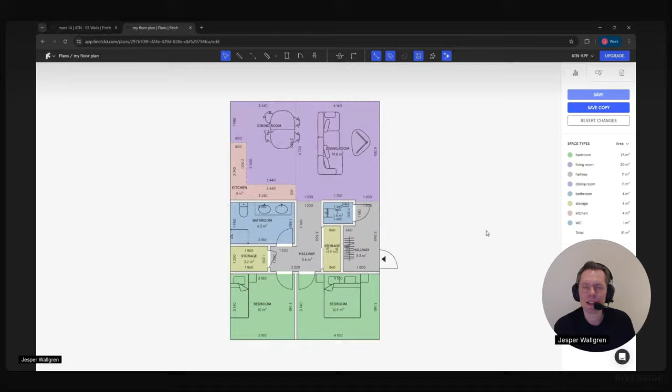This is how a plan looks in Finch. And what's special about it is that you can stretch it a little bit like this. You can see the whole plan moves, everything becomes wider. That might not be how you desire that your architecture should behave. So then you can go in and set constraints.

As an example, you can say, I don't want my bathroom to flex because I'm going to use a bathroom module. And I actually don't want this one to stretch either. The corridors, they can stretch, but they cannot get more narrow than they already are. So then I'm going to set that kind of constraint. And the next time we flex the plan a little bit, you can see that the bathrooms stay fixed and the corridors take all the discrepancy.

So this is a great way of communicating with the system how you would like your design to behave. And of course, it's not intended to take a 50 square meter apartment and stretch it up to 300 square meters. It's more of a reuse of your designs when wall widths change, when sites change, and so on. And if you design double-loaded corridor projects like this one in the demo, you usually have a lot of these really great floor plans that you already have designed that you would like to reuse in projects, even if the unit mix changes a little bit.

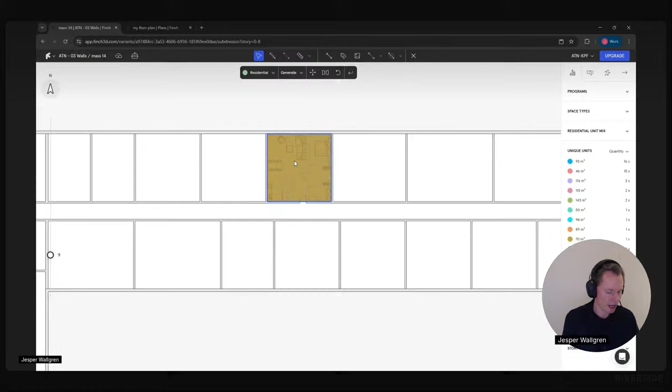I'm going to select all of the same one. I'm clicking Control V. And as you can see, it gets pasted into all of the units. It got rotated as well, so you can enter it from the corridor and so on. And if I go into it, you can see the plan is used in 18 units. So if I, for example, move my little Eames chair here a little bit, you can see that it updates in all of the units. And that is, of course, very important. And this is the kind of level of detail that we're going to get down to.

If I would like to steer the generation even further to specify what I want, I can use my graph rules. I'm going to head over here. Oh, I have a little warning here. I'm just going to remove that one little stump. There you go.

This is the graph. You can see all of the rooms are mapped with the graph. This is the foundation of Finch. That is how we can generate things that make sense. So if you have a look at this unit, for example, you can see that all of the spaces are mapped as nodes, and then they're put together with the graph.

And this is how we make sure that you enter the apartment from the corridor into the hallway, so you don't go from the elevator into the toilet, because that is not how you create architecture. It's usually not. Of course, if you want that, you're free to do it, because you can do anything in Finch.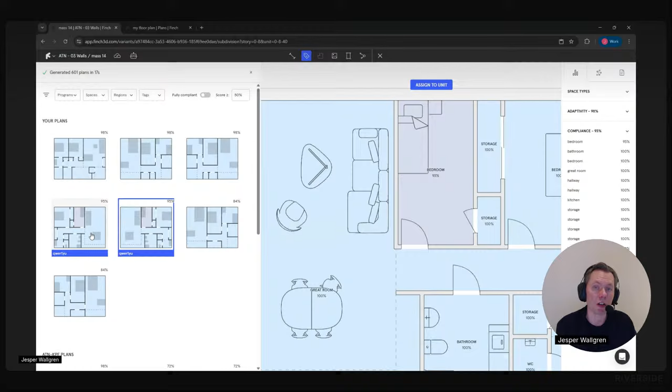If I don't wish to see anything that is not fully compliant, I can of course just turn on fully compliant. I don't have to see it. But usually as a designer, I think it's nice to just see it, because sometimes the design might be good, and I know I can fix it just by moving some walls and so on. But I leave that up to you.

We also have some other scores here, for example, daylight. And if we open this one, it evaluates all of the plan based on the different space types, if they need daylight or not. For example, the blue ones here, they need daylight. It's bedrooms, it's great rooms, and so on, while bathroom, hallway, storage does not need daylight. So that is put further into the unit.

And then we have adaptivity, and what that is basically is how similar it is to your data set. Has it been manipulated a lot? How similar is the result to the original design that you provided? For example, this one got a lower score. You can see that the adaptivity is really low. That is because it has probably been generated in a way that doesn't remind you of the original architecture, while this one that has a high score looks much better. So let's use this one, for example. Let's add it here.

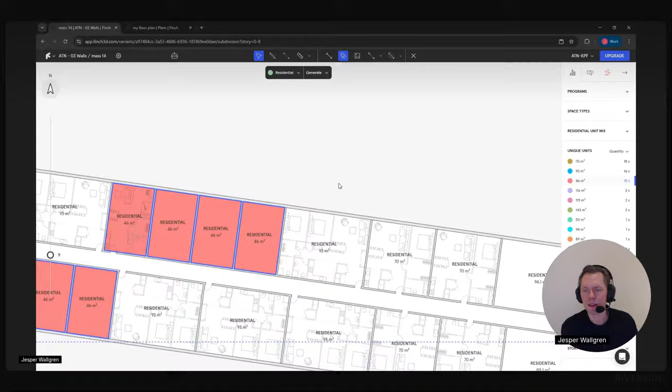And as you can see, already now we're starting to get a fairly high... we've been designing this for an hour, I've been explaining what I'm doing, and already now I have a really nice project with a high level of details and linked plans and so on. So,

let's move on. Let's fill the unique ones as well. Or maybe we start with the tower. What do we feel like? Let's do these tricky ones down here. Let's use that one. And speaking of furniture, let's add an object. Let's add a dog. There we go.

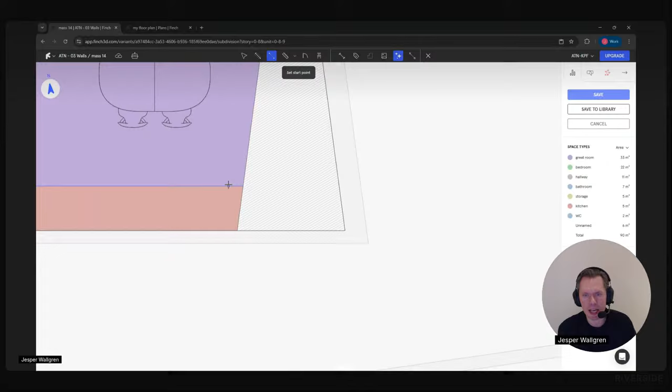I'm going to take this one, copy it and paste it over here. As you can see, it did not fit at all, so I'm going to mirror it to make it look exactly like the other one and position it in the right place. There you go. And of course, this is the other unit that is tilted in here. But if I go into this one, I have one of my favorite things in Finch. Let's pull this all the way out here. I can click union.

What happens when I do that is that it takes this plan and fills this one as well. So now I have the same plan. Maybe this kitchen is a little bit too long, let's do like this. Now I have the same plan in two differently shaped units. So if I update one thing, for example, I added a dog, you can see that it's in both places. So even if it doesn't have the same shape, you can have the same linked plan.

And this is a really powerful tool, especially when you work with advanced projects like a UN Studio or Zaha project where you have an undulating or sloping facade. Then you can have hundreds of unique units, but actually using the same plan. And that also saves a lot of headache when clients ask you to update some of the plans and so on.

Okay, let's just fill the last ones here so we have some nice plans, just so Ruben, when he's going into Revit, has the whole building filled out. There you go. As you can see, I'm using a lot of the plans I've added to this project. Of course, I could use other plans as well, but I like the fact that they're getting in here in the same style, with the same furnishing and so on.

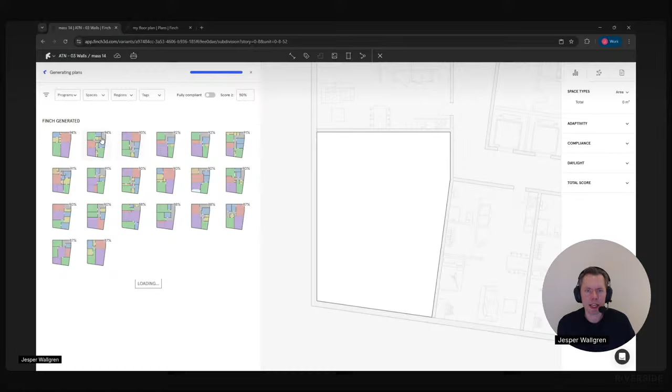I think this is a good example of where I do not get any results from my own plan library, but I get some suggestion from Finch of how I could furnish this one. I think I preferred this one. Let's add that one. There you go. So that's the podium. We have generated a lot of plans here, furnish it.

We can see if we turn this one on. I selected someone with bedrooms. That's because I did not specify that this is not a closed bedroom, so I get a little warning. Maybe change this one to create a new space type called studio. Make it green as well. Whoops. Save it. There you go. Perfect.

Maybe update that a little bit. Let's see if we can run that one again. Do I need to? Sorry. Why is this one lingering? Let's see if I can get it to update. I'm just going to refresh the browser. Non studio. There we go. I think I have some update problems. I'm just going to make a little hack here, see if it works.

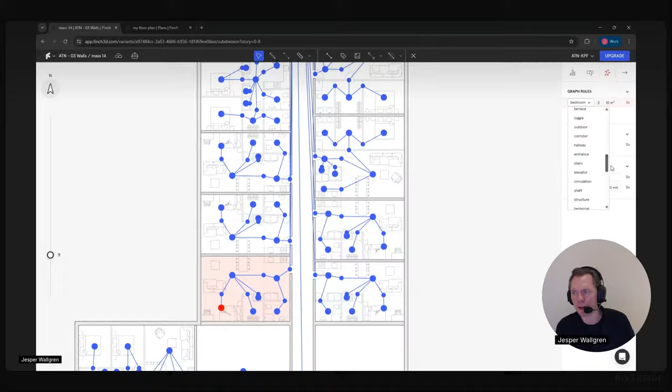Anyhow, it's because I'm in the classes. Just give me a second if I can figure this one out. There we go. I was in the space classes, so then it takes everything that is similar to a bedroom: studio, alcove, and this kind. So now I specified on space types the bedroom. Of course, I have not updated this one yet. Let's put this one as studio as well.

This is the beauty of live demos.

There we go. Then I have some small bedrooms in this one. That doesn't bother me that much. I'm aware of it. Let's keep it like that. Okay, there we go. So we've populated this story here. Let's work with the towers and fill the whole project out here. So then the question is, will I start up there or at this story? I think I'm going to start in the tower actually. Let's go into the tower here.

And the same thing, let's generate floor plans. Let's start with the big ones. Do we have some nice ones here? I think I'm going to go with this one. I mean, that's a preference. I think it's nice with the living room in the corner like this, and then we have two or three bedrooms like that. I think that's a nice distribution. Just copy paste it out to the other ones. Let's do it same for this one, and then let's fill these ones as well.

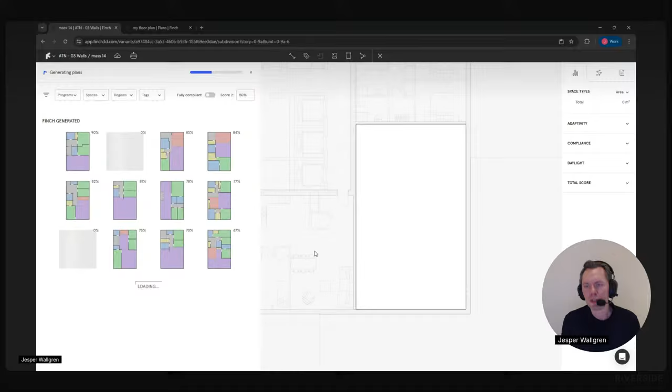I think there's a lot of talk about AI and creativity, whether or not it removes it or enhances it. I'll leave that up to you guys to decide. But me personally, I think it's very inspiring, and it's creativity for me to just fire it up and kind of curate the project. Let's add this one. I don't feel like this is taking the creativity away. I find something I like. Now, of course, I don't have that much time to go deeper into everything, but I can then fix it, add it, do whatever I want with it. It's up to me as a designer.

And I really like the fact that it really speeds up the process, and then you get it into Revit. When I started working as an architect, you started a render in the evening and hopefully you got back to something that looked okay in the morning. Now we see all kinds of different AI tools that render basically in real time, and I think it just helps me to be creative. I'll leave it up to you guys, of course, but I enjoy this.

Let's paste the last ones here. There you go. We have our towers as well. The last thing I would like to do before wrapping it up here for Ruben is to fill the whole project. I'm going to copy these towers all the way up.

It will probably take a little bit of time here for Finch to calculate all of that. I'm going to fill the whole project here with floor plans. There we go. And then let's see what we have. 10 minutes left. Okay, let's do one thing before we wrap it up here.

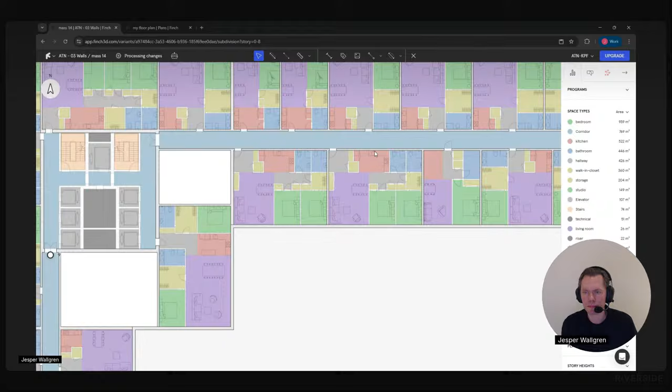Let's leave the technical things over here. Maybe we could fit something if we do it like this. I'm going to move this one up here. That's probably a little bit more reasonable. Fit that one.

And let's see if we can generate something here as well. There you go. So there you go, we have the whole story filled. That is a lot of apartments.

Actually, it is 65 apartments in this particular story. And I can have my diagram here. That's very nice. Now all of the apartments are linked, so I can go in and update things in one.

But if I would like to update things in multiples, it can be a little bit tricky. You know how to do it, you do it all the time, you do it manually, you go in and change something.

But I think it would be a good opportunity to show what Archie can do. Archie is our little helper here, so he lives up here. It's a little architecture helper. I'm going to write something.

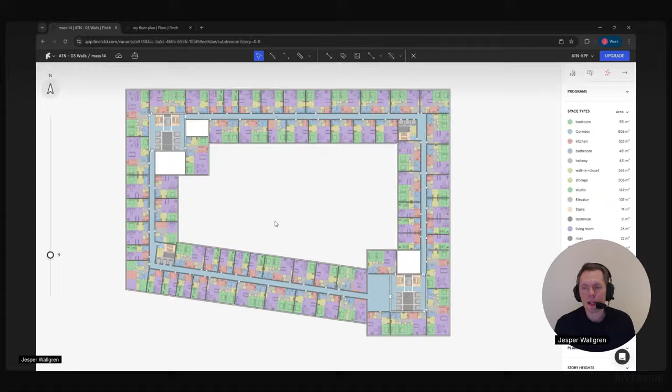I think it's almost done. There we go. I'm going to interrupt him now. There you go. Last thing, let's copy it out to the full building.

Let's take this one. Oh, actually, I promised you some bigger apartments as well. One of my favorite moves when working with high-rise is to make sure that the vertical alignment works well. Just give it a second, take an existing part like this and just move this one into the middle.

For example, remove this one, and voila, we have some bigger apartments here. And since we always have our diagrams to help us, we immediately know how big they are and how they will work.

Oh, maybe I wanted to keep the big ones. Let's see, what was I thinking now? The other way around, let's paste them.

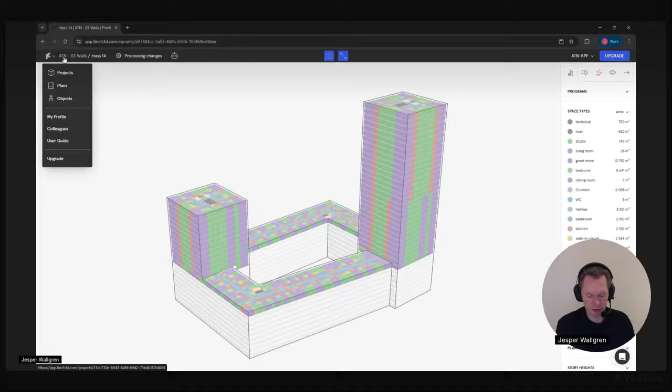While we let him work, let's copy these ones as well down to the bottom. While he works, let's go to the project overview and open my bundles.

As you can see, my unit mix has started to pop in here in the part I've worked with. Imagine now that you have a colleague working on this one with another typology, maybe an office building, and you can see these updates in real time. This is a great way of working on big projects together.

And since it runs in the browser, it's always live. There's no files you have to merge, nothing that's outdated, no saving with weird names in the middle of the night. Everything updates instantly.

It takes a couple of seconds for it to paste out in the rest of the building, but as we're waiting for this, you can see the breakdown of the different things here.

If I would like to see, for example, where I have all of my bedrooms, I can single them out like this. I can change from area to quantity to see how many bedrooms. The only thing I have more of than bedrooms is storage. I have a lot of storage in my buildings.

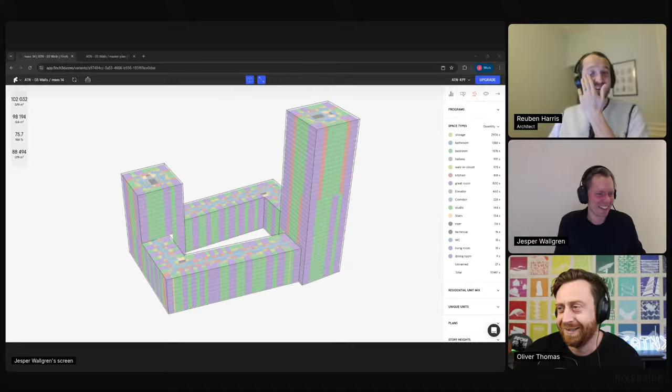So now it's ready for Reuben to crash Revit. I'll bring Reuben in. Thanks, Ollie, I feel you got a big challenge ahead of you here. You've got 30 minutes to make that giant Revit model. Let's see what we can do.

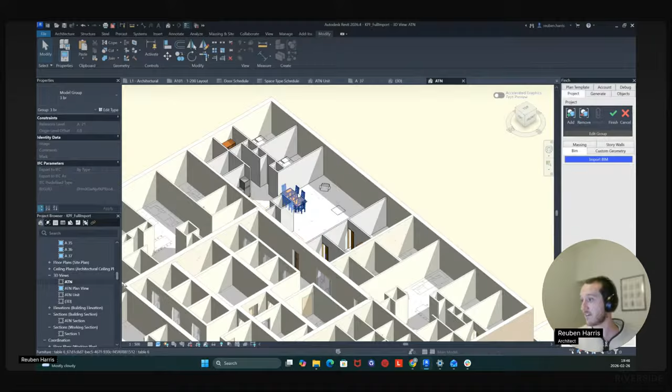So this is a model, and I have done no editing of the geometry here. This is just mapped directly from Finch out into Revit. How does it come out, you're probably asking? If we go ahead and select any of the units, we can see that first they come out as a model group, and this model group is named however the unit is named in Finch. Within the model group, we can then see we have mapped to these tables. I can see I've mapped to my kitchen unit here, to my closet, and to these beds. In cases where I haven't mapped my furniture, it's just come out as a little 2D Eames chair that you can swap out manually if you'd like to.

Let me close out my model group here and jump into one of my stories so we can see in even more detail. If I select all of these instances in the entire project, we can edit one of these model groups, and that's going to update across the whole tower. As well as all the walls, we also get all these room names, and these room separators. So really what's landing here is a model which should require as little rework for you as possible.

Of course, once I bring in all of this 3D geometry, I then get all the other things that if you're an architect like me, you just love making door schedules. So now we can have these right here. We can get all the door types with the quantities, the widths, and the heights. Obviously you can refine this in as much detail as possible to see as many of the door metrics. Also get space type schedules. And I can then go ahead and start laying these out on my sheets like so.

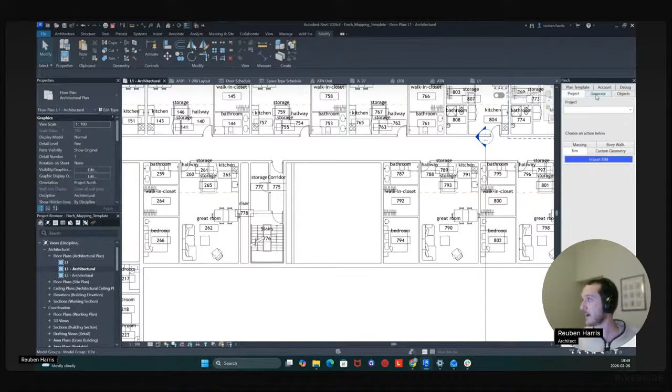But maybe you just want to stay here and see, have we got anything in our plan library that might be suitable for this unit? To do so, we're going to come up to our plugin again, and this time I'm going to click on Generate, and I'm going to click on Generate Plan. From here, I'm just going to click anywhere inside the unit, and then I'm going to click the wall that I'd like my entrance to be.

That's the 2 clicks we have to do. We then go on Finish. All right, if we're going to be pedantic, it was 3 clicks. We've done 3 clicks, and we now pull up our plan library directly here in Finch. So once this starts going, this is going to look pretty similar to what we've just been seeing through Jesper's workflow directly in the browser.

So up first, I'm going to get any plans from my personal plan library. Underneath, I'm then going to be getting any of my organization plans. And then I'm going to be getting all my Finch generated plans as well. We could, of course, go ahead and maybe we want to specify a little bit further. You know, I want just residential. I only want plans with 1 bathroom, with 1 bedroom.

If we're working perhaps with a specific client, we might have a tag assigned to the plans with this client because, you know, we might know they're very specific about the bathrooms that they want us to use. So we can, of course, also filter by those tags as well. I like the look of one of these units here. Which one should we choose? Let's choose this one here. I'm just going to click on my unit and give Revit just a second here.